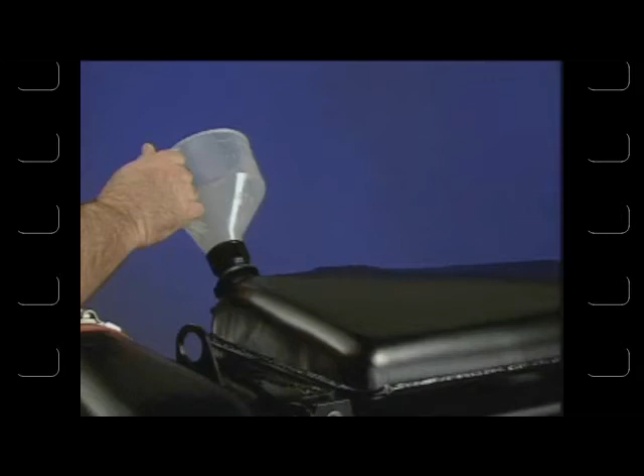One of the features of the positive flow deaerating cooling system is in the way the system fills with coolant. The cooling system must be able to accept coolant at a rate of at least 5 gallons per minute.

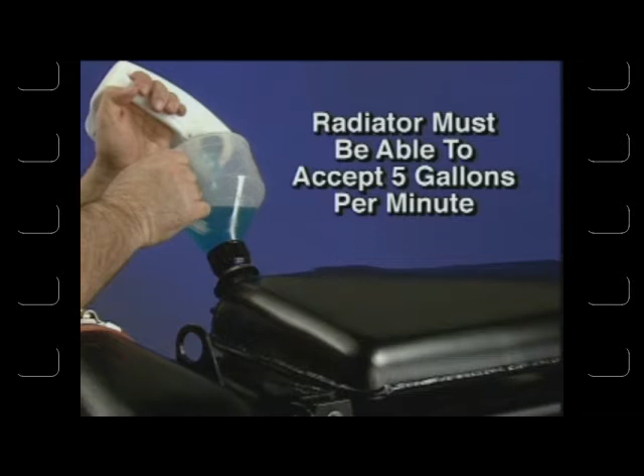Coolant flows out of the reserve tank through the fill line to the engine and radiator. The engine fill line is installed in the rear of the water pump inlet. Flow from the fill line allows the engine and radiator to fill with coolant from the bottom of the system.

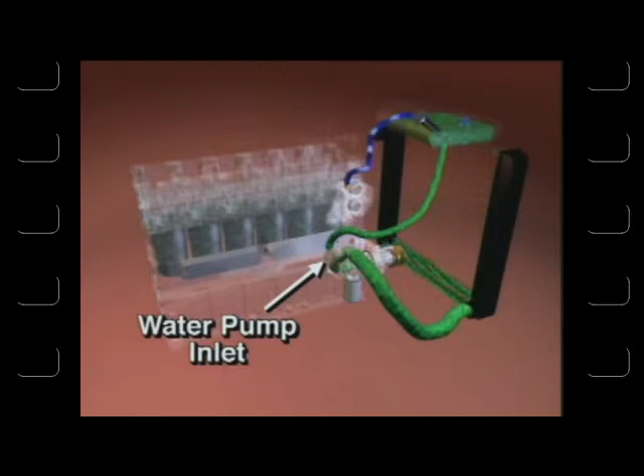As the system fills, the coolant pushes the air out of the system through the engine vent line and the radiator core vent tube.

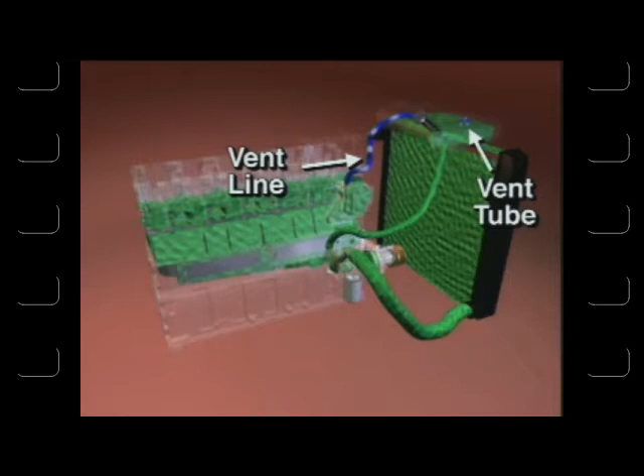After filling the engine and radiator, coolant fills the reserve tank until the coolant level reaches the bottom of the fill neck. The position of the fill neck limits the amount of coolant in the reserve tank. This room in the tank not only leaves room for expansion, but also ensures that the radiator core vent tube remains open.

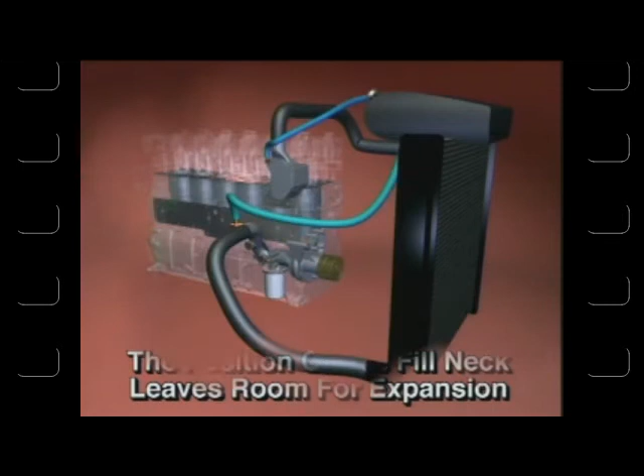Coolant flow begins as coolant is drawn into the water pump inlet by the belt-driven water pump mounted to the front of the engine block. The phenolic impeller draws coolant into the water pump housing and supplies coolant flow to the engine. The pump produces 62 gallons per minute flow at peak torque with a rated speed pressure of 24 psi.

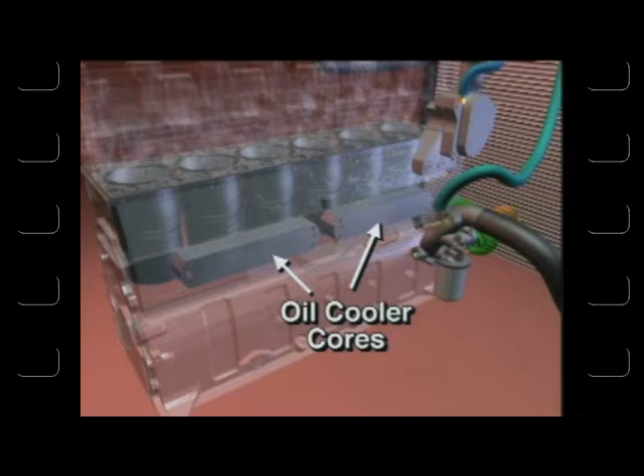The output from the water pump empties into the coolant cavity surrounding the oil cooler cores. This provides the oil cooler with the lowest possible temperature coolant. As the coolant in this cavity passes around the oil cooler cores, heat is transferred from the oil to the coolant. Coolant passes out the top of this cavity through the small cast openings.

From these openings, coolant enters the water jacket area of the block. In the water jacket, coolant travels around the liners, carrying combustion heat to the top of the block.

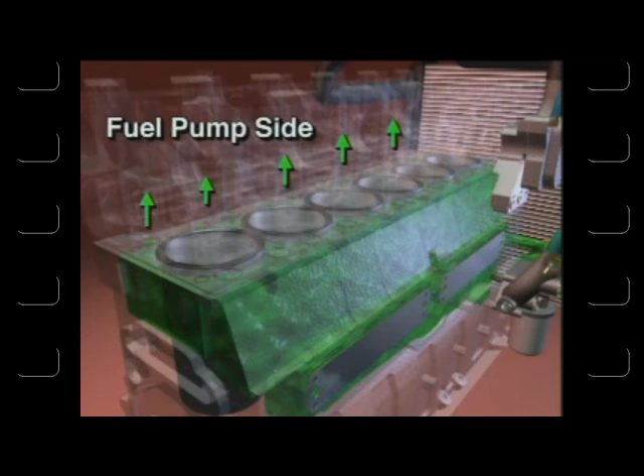Coolant passages in the top of the block are sized to force most of the coolant across the engine to the fuel pump side. However, small openings on the exhaust side of the engine block allow some coolant to enter the cylinder head from the exhaust side of the engine.

Coolant flowing up through the passages in the fuel pump side of the cylinder head gasket flows to the lower water cavity through passages in the cylinder head. This flow cools the valve seats, injector area, and the exhaust ports. This coolant continues its flow across the cylinder head.

From the lower cavity, coolant flows to the upper cavity. This coolant helps to lower the temperature of the exhaust ports.

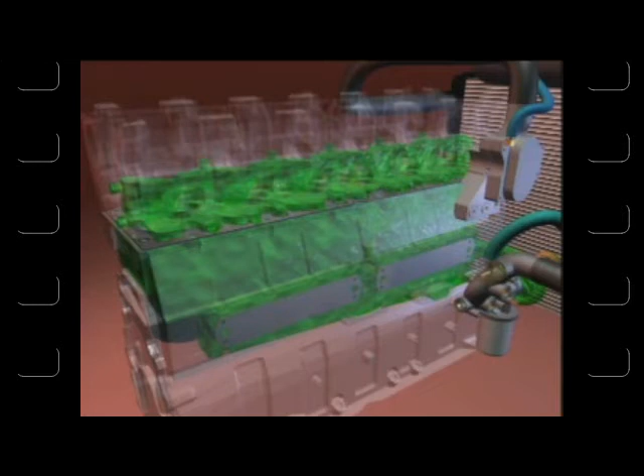The coolant then flows to the exhaust side of the cylinder head, toward the front of the engine, through the return manifold in the cylinder thermostat housing, where it circulates around the sensing bulbs of the thermostats.

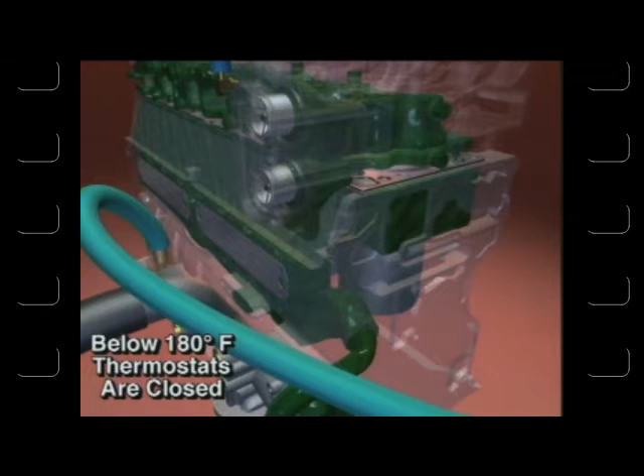When the coolant at the thermostats is below 180 degrees Fahrenheit, the thermostats are closed, allowing the coolant to flow through the center of the thermostats to the outboard side thermostat housing cover. From this area of the cover, the coolant flows back through a return passage in the cover and thermostat housing

to the bypass passage in the engine block. When the thermostats are in this position, the coolant is directed to bypass the radiator and flow back to the water pump inlet through an internal passage in the engine block.

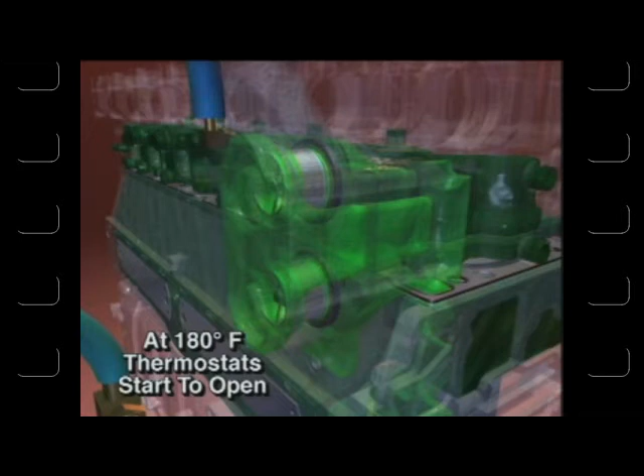As the coolant temperature increases to 180 degrees Fahrenheit, the thermostats start to open and coolant flow to the bypass begins to be restricted. In this position, some coolant is directed to the bypass and the remainder is directed to the radiator.

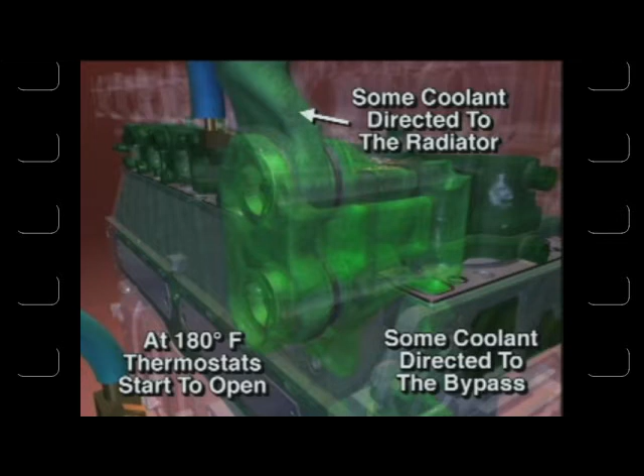When the engine operating temperature increases to 200 degrees Fahrenheit, the thermostats fully open, blocking the bypass passage in the thermostat housing cover. When the bypass passage is blocked off, all of the coolant flow is directed to the radiator.

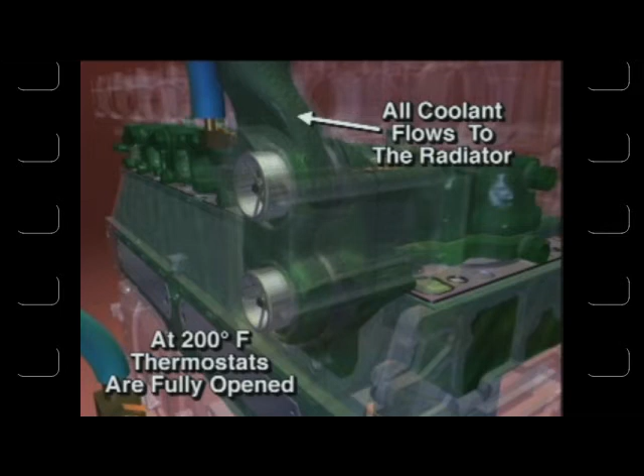The engine must never be operated without either of the thermostats. Without a thermostat, the coolant recirculates, bypassing the radiator, causing the engine to overheat. Coolant returns from the radiator to the water pump through the water pump inlet.

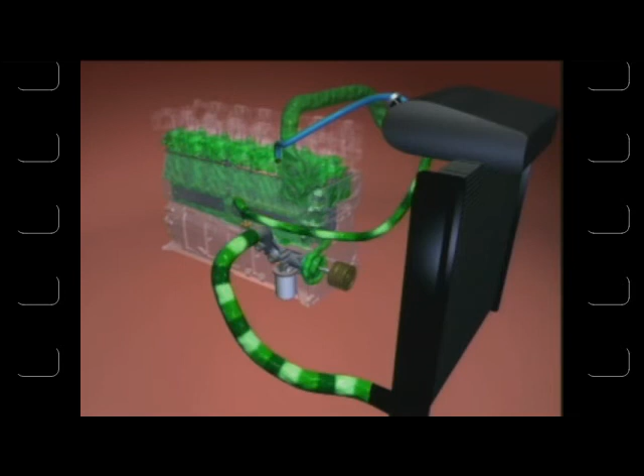With a positive flow deaerating cooling system, water supply to the inlet connection of the water pump is supplied from 3 sources: the bypass passage, the bottom tank of the radiator, and from the fill line.

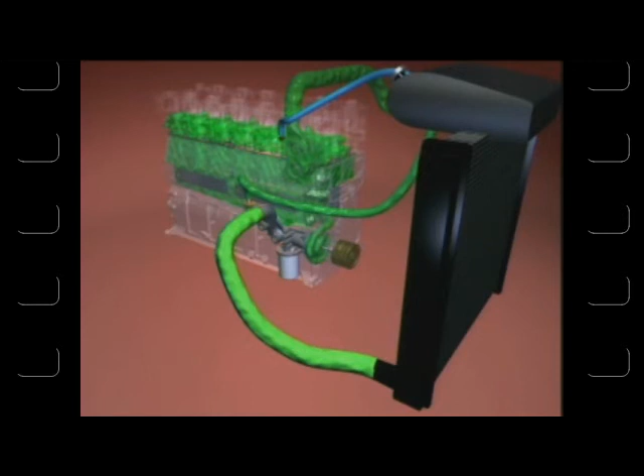When the thermostat is closed, the pressure in the block circuit causes the supply to the water pump to flow from the bypass passage. When the engine reaches operating temperature and the thermostat opens, the pressure in that part of the circuit causes the flow to come from the bottom tank of the radiator.

As the thermostat changes position based on engine coolant temperature, the flow of coolant is modulated between the bypass passage and the radiator to precisely control the coolant temperature.

The fill line ensures that there is a positive flow of coolant at the water pump inlet at all times. As the water pump increases in speed, more coolant is needed to increase the coolant flow. When the block and radiator circuit cannot supply enough coolant, the low pressure at the pump draws coolant through the fill line.

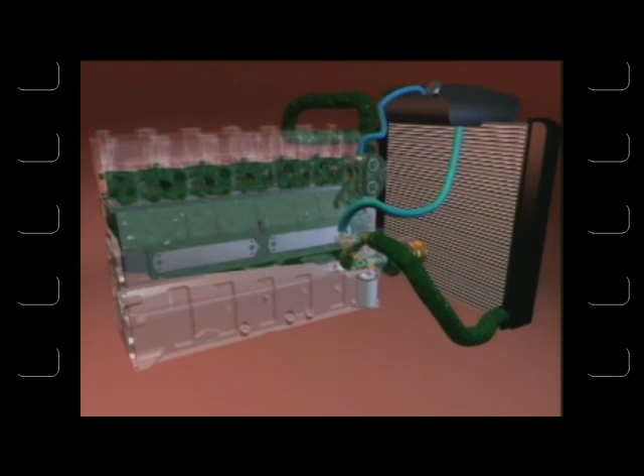Some of the pressurized coolant from the water pump outlet is directed to drillings in the water pump inlet. These drillings supply coolant flow to the coolant filter. The higher pressure coolant from the water pump flows through the filter and into the lower pressure water inlet.

The coolant port toward the middle of the engine block provides pressurized coolant flow to the air compressor. This flow comes from the water jacket in the block.

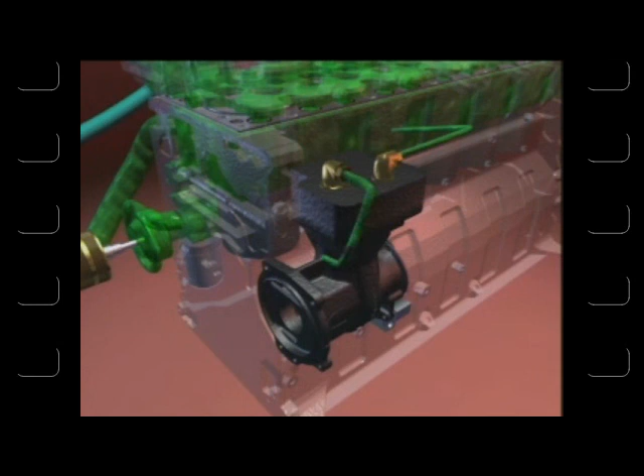The connection in the block near the gear housing provides for coolant flow from the air compressor. This port connects to the coolant bypass passage.

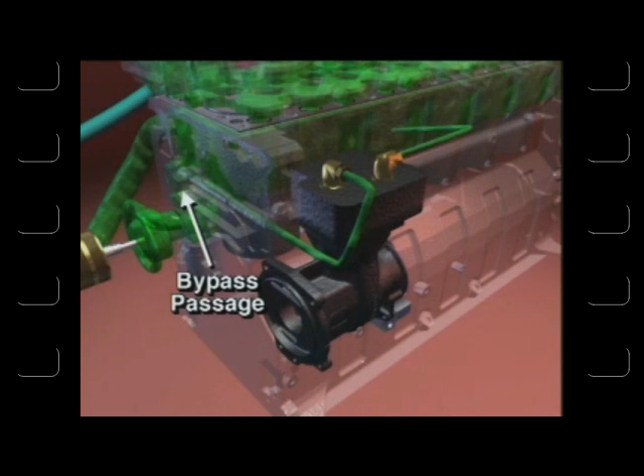Since the bypass passage is directly connected to the inlet side of the water pump, this area has a low coolant pressure. The pressure differential between the coolant in the block and the coolant in the bypass passage causes coolant to flow through the air compressor.